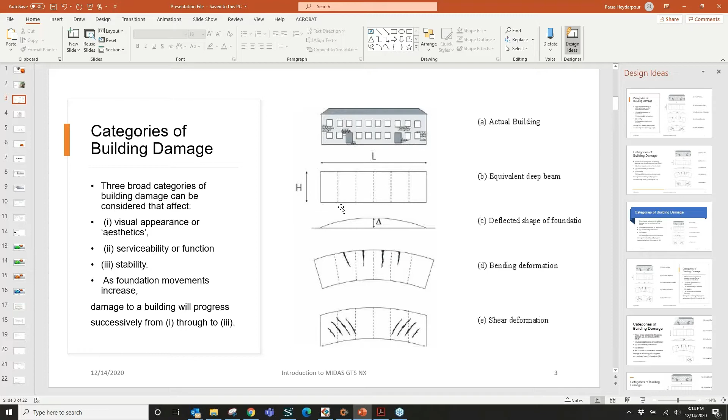And obviously, as you have more displacements, the cracks will open and you will have more challenges facing you. Here in this slide, I'm trying to give a presentation of different levels of damage that we can face.

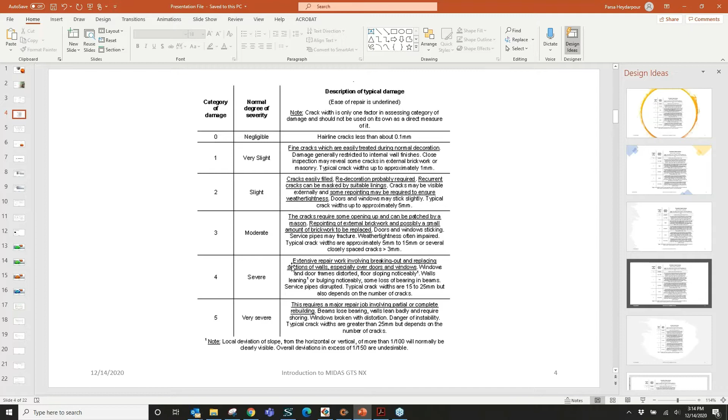It goes all the way from negligible, which is pretty much hairline cracks at 0.1 millimeter, all the way to cracks that are almost an inch in width, which can jeopardize the stability of a structure, and all other cracks anywhere in between.

So as I told you, there are many different researches out there to try to quantify these damages. One of them is proposed by Mr. Burland and Wroth, which we incorporated here at STE quite a lot to evaluate, especially for the Northeast Boundary Tunnel project located here in Washington, D.C.

Using a software, you come up with the settlements that you have, then you turn those settlements into displacements, and displacements into tensile strains, and then you have a measuring tool that you can use to evaluate what level of damage you should be expecting.

So having this in mind, this is going to be the goal of this project—to have a structure. For example, you can see the footprint of this structure adjacent to the excavation. So basically, we can define investigation points, and these investigation points are going to be used to determine what settlements we are expecting.

And based on those settlements, we can evaluate the building, see what type of sagging or hogging or compression or tension that's going to be exposed to the facade of the structure.

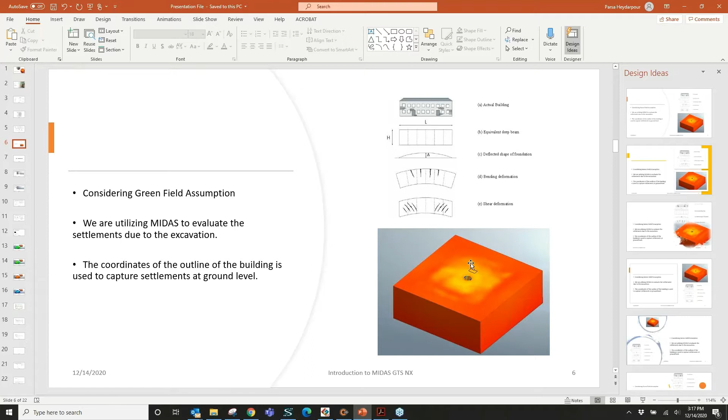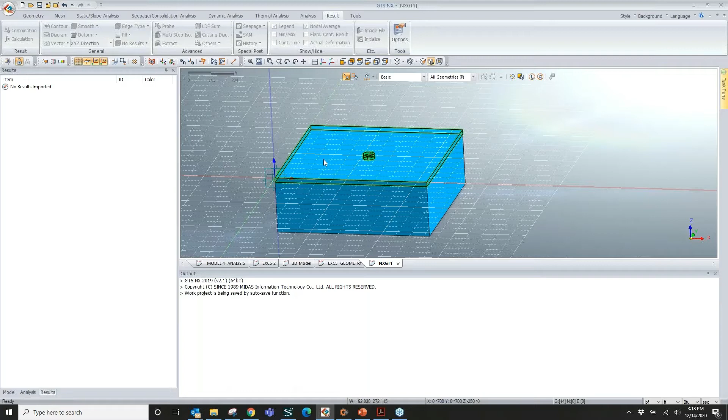So having this in mind, today I want to go over a few MIDAS tricks in order to model a shaft, and let's see how far we can get. If we have enough time, I would definitely like to go toward showing how to do dewatering, which is extremely important in order to get realistic settlements. So I have a few sample models here.

Again, the mentality is the same, whether you have a rectangular excavation with a different pile, with multiple piles and different levels of strutting, or a simple shaft. The mindset is the same, only the application is a little bit different.

Let's start. So I'm going to create a new model. And as you probably know way better than I do, in this page you just go and set up what system you want to work with, and then hit OK to create a new model. And then I would like to go a little bit over how to define a geometry of the model.

So I'm going to define a rectangle to work as the boundaries of my soil box. So I do 700, 700, and I will call this layer soil. This is going to work as the boundaries of my soil box.

And then I would also like to have a shaft, which is going to be a circle, and I do a radius of 15, and I like to call it excavation. So it's created here, and I need to move it.

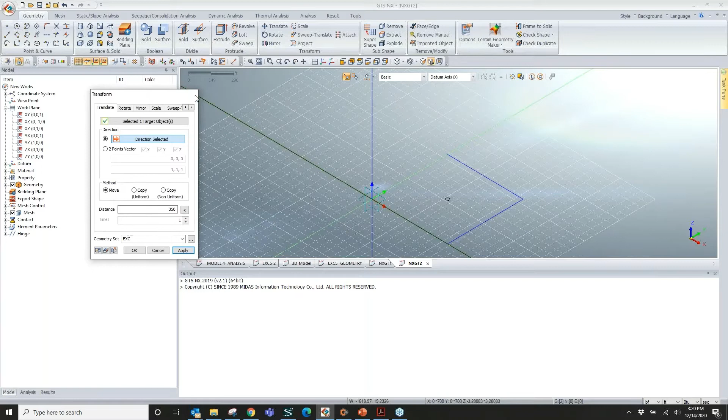Okay, so now I have my excavation. I have my soil box here. I have my circle that's going to act as my shaft. And now I also like to have a few cutting planes that I'm going to use to cut my soil planes and everything. So 0, 0, 1000, 1000.

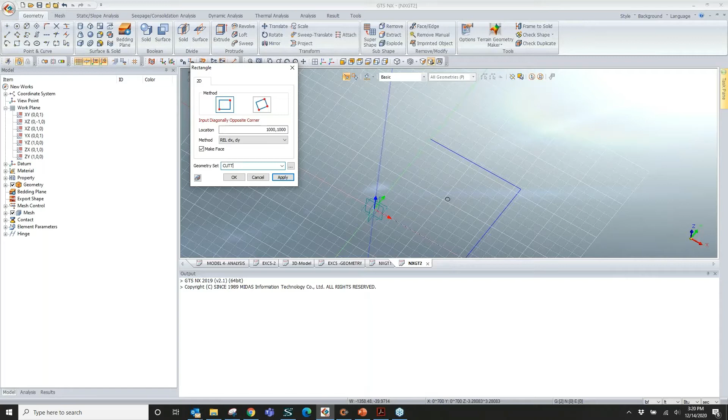I would like to make a face, and I would like to call it cutting face. Apply. Now I have this.

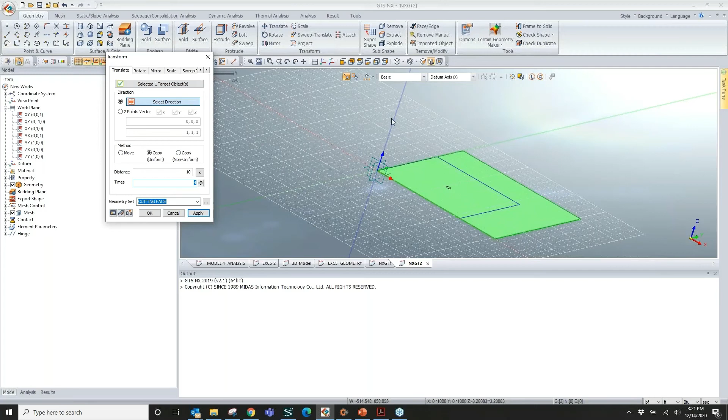Now again, I'm going to use one of the very useful features that MIDAS has implemented inside: the copy feature. I want to copy this every 10 foot for 4 times. This is a very useful thing to preview. Oh, okay, it just tells me I need to select the direction. Forgot that, I do preview. It's wrong direction, I know. That's the beauty of preview, so you can see before applying.

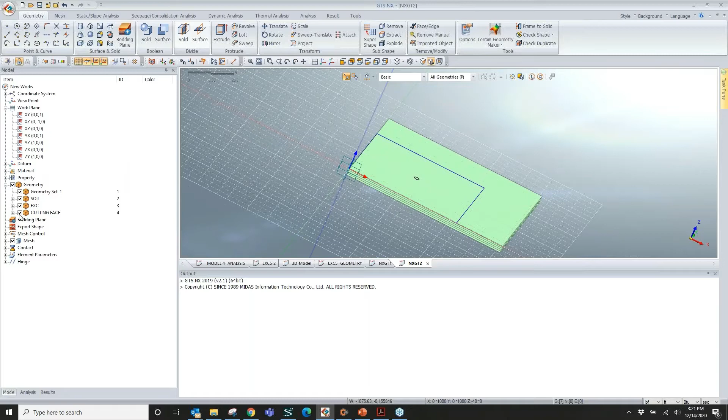Cutting faces, apply. So now I have created all my cutting faces that I'm going to use later on. And I always like to put them under different names. Later on, you'll realize how valuable this trick is to have them in different names.

And now I'd like to extrude in order to get to my geometry. So select objects, I would like to do select edges. And then I would like to do a -250, definitely under soil. Apply. Then direction, we forgot to select direction. Apply. That is good, that's what I wanted.

And then I'd like to do my geometry, similar. Select object, edge. I would like to do a 50 foot, a -50 foot. And then again, definitely under excavation, preview, apply. And now I have this.

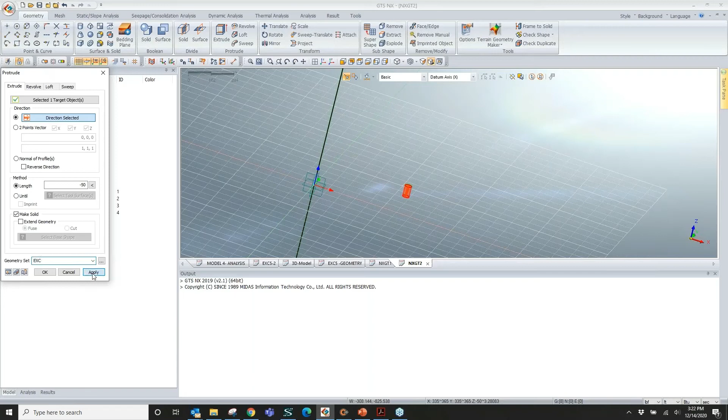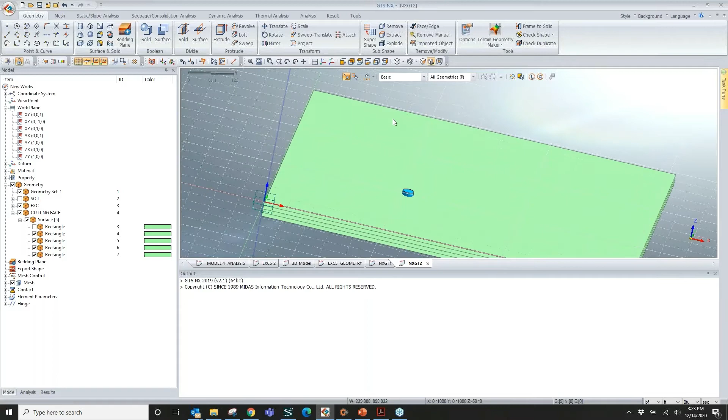And as you know, when you have an excavation of 50 feet, you are not going to do it in one step. So you most probably need to divide it into multiple stages of excavation. That is why we generated these cutting planes. So what I'm trying to do now is divide that one-stage excavation into multiple, using these faces. We are going to tell the program that we want to apply this into multiple stages.

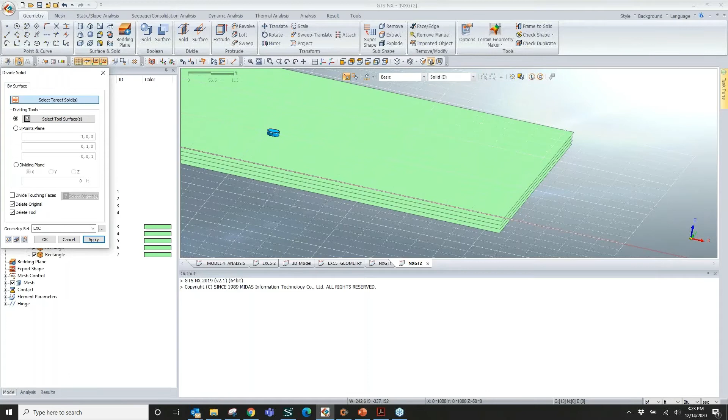So now if I turn my cutting planes off, now we can see that we have each layer, and later on when we define the different stages of excavation, each of these is going to be excavated at a different stage.

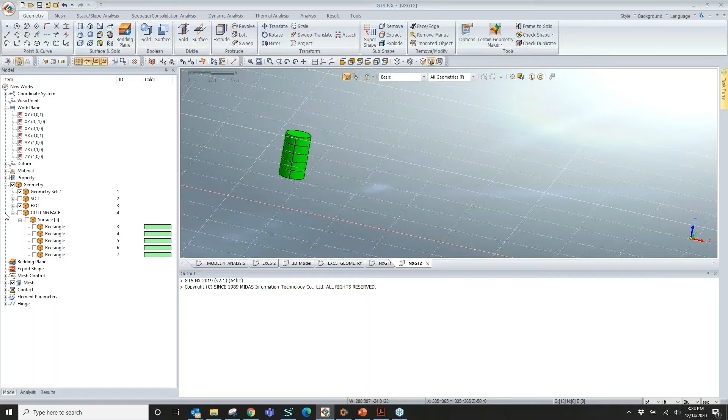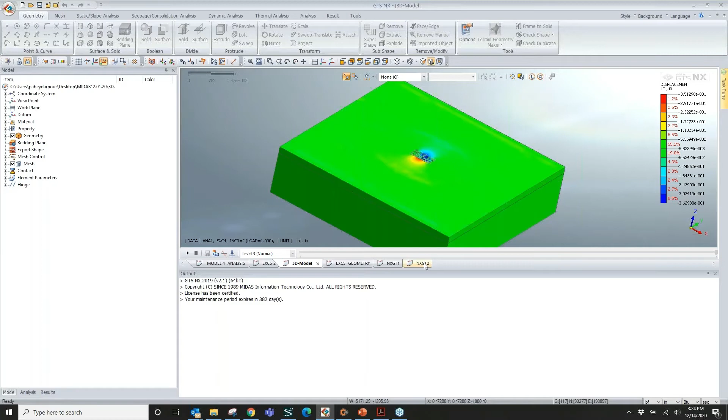So the same thing can happen to your soil. So for example, you can have one layer of soil similar to what I have here, or you can have multiple layers of soil similar to what I have in this model. Generally speaking, the modeling is not really different, but if you have multiple layers of soil, MIDAS has the capability of applying that as well.

So for this example, I would like to divide this into 2 segments. So later on we should be able to assign 2 different soils, 2 different soil types here.

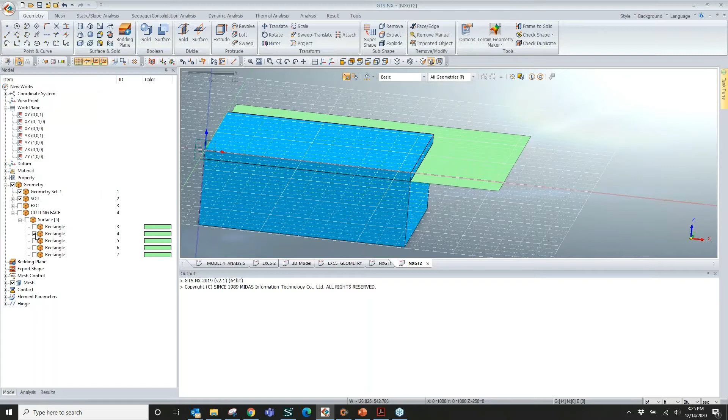Apply. Now, target object. One second, because I need to hit escape. Okay, solid, select target, there you go. Surface this one and this one. Fine, okay, now I can turn this off. Now I have 2 different layers of soil.

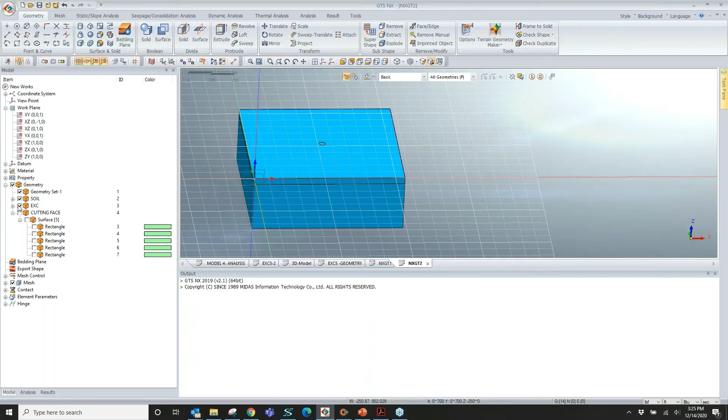One other thing we need to do is make sure our geometries are recognizing each other. When we want to excavate, we need to make sure that at each stage the connections are properly done. MIDAS has an auto-connect feature, so I can do this, and now we can see the geometries are recognizing each other. This is a very basic overview of things we need to do in the geometry portion in order to model a shaft excavation.

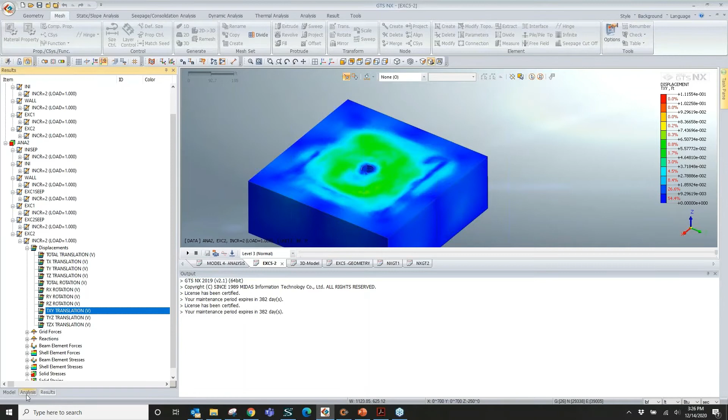The most important thing in my mind is properly defining materials and properties. MIDAS has quite a variety of different constitutive models you can work with. In one of the files I prepared for this session, I have defined all of these, so let me pull up the file I wanted to present. Let's unlock this so I can go over the differences.

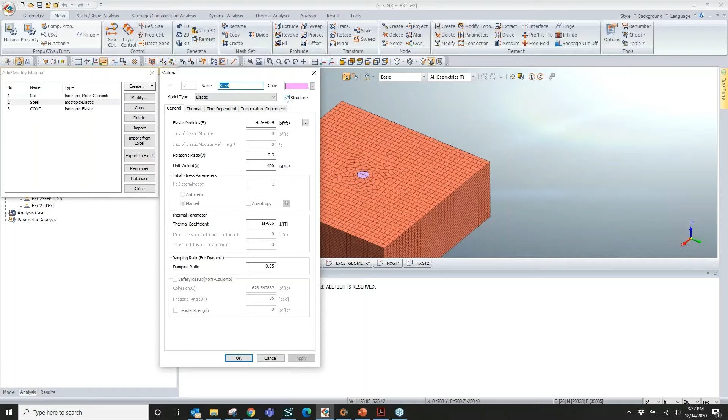For example, for the soil I have used Mohr-Coulomb, and you define all the properties you need. Make sure that if you want to dewater, you need to define the unit weight of saturated soil - that's very important. If you have a structural member like a steel rib, you need to click on structure, so the porosity parameters can no longer be defined for a structure. If you have a shell element, that could be your steel corrugated beam, steel corrugated sheets, or a concrete diaphragm. You need to define them here, and later you can define their properties.

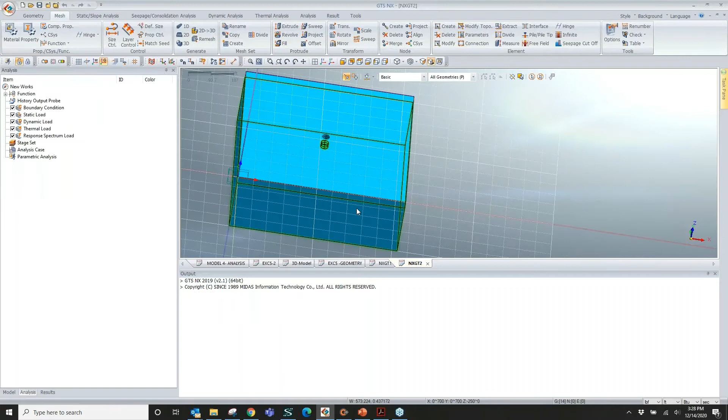Actually, I'd like to go over this, because in this model I also had steel ribs, and that's something I'd like to show you how we typically do it.

If you have this curve on - let's say you have 5 stages of every 10 feet and you want your steel ribs spaced every 10 feet - you have this capability embedded in MIDAS where we can draw these circular sections, and later assign them whatever geometry we want. Then we mesh them and they work as our steel ribs. In order to do that, I need to use the translate option here.

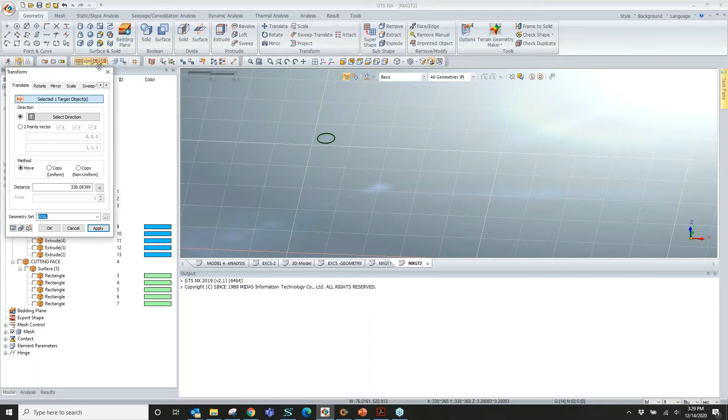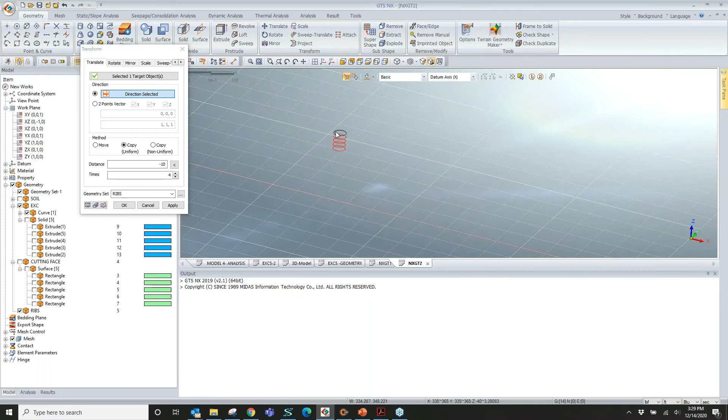I have selected my geometry. I do every -10 feet for 4 times, and I need to do copy uniform 4 times. I want to create a new group and call it steel ribs, or just ribs. I add that here, then I'll be able to select ribs. I do a preview - looks right to me. Later, we will select a proper W section, assign this geometry that specific W section, and that should be good enough for us. Then we mesh that, and that will act as our steel ribs. I hit OK, and now I have my ribs as well.

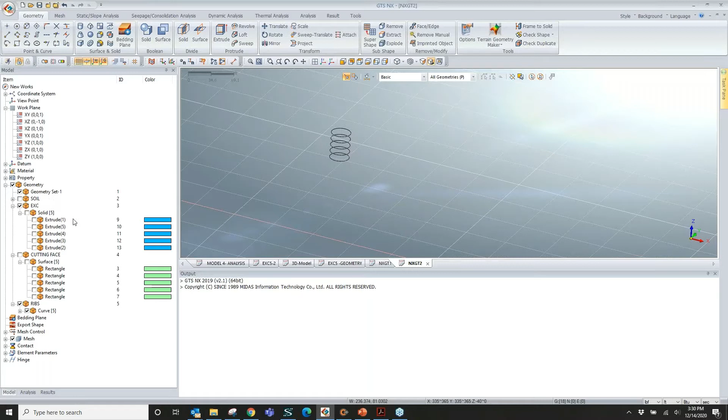If I turn this off - one good feature MIDAS has is you can easily move things around. So if I want all 5 of them together, I can just drag and drop things. This is a very handy feature MIDAS has. I appreciate every engineer working hard to make this program user-friendly. I'm someone coming from the background of FLAC, so I know what not being user-friendly means.

So let's go to - now I guess we have properly covered the geometry.

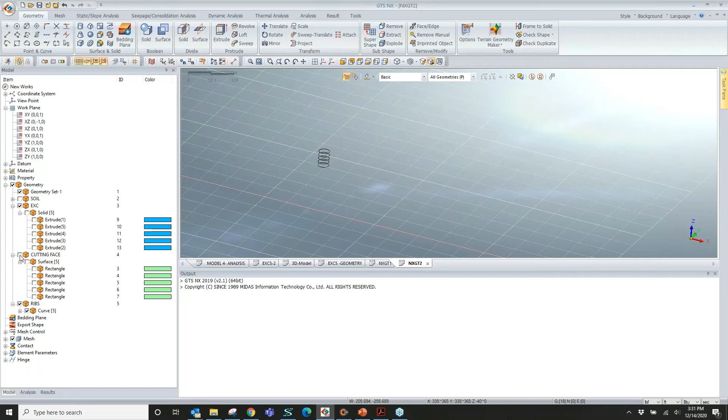After this, the next stage would be meshing, which I have a model here. I'll give you a few pointers on how to do the meshing. I'm sure you know better than I do, but I always recommend a 3D mesh.

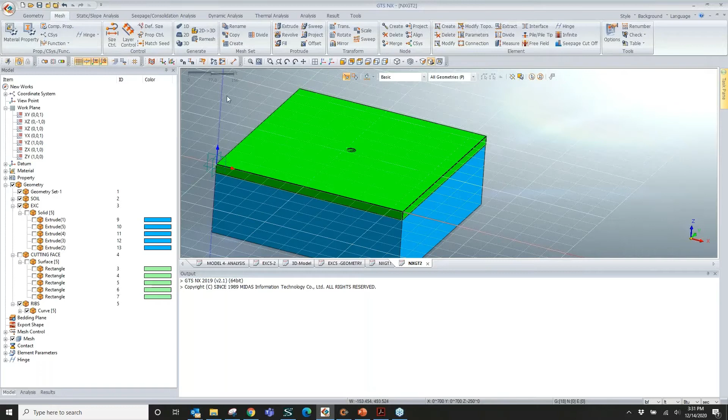One good feature MIDAS has is if you want to give the program a hint on how you would like to mesh it, you can define nodes here. For example, on each edge I can define that I want 20 points, and later the program will use these points to create the mesh set you have. So if I select these corner points and tell MIDAS I want, for example, 5 nodes on each one, I can later use these nodes to guide the program on how to mesh the geometry.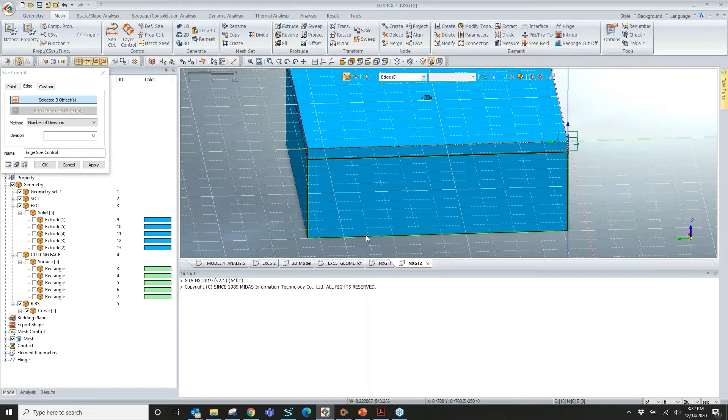These few things, these small tricks, really become handy to have a model that isn't too big and keeps the running time from becoming crazy long.

Are you with me, guys? Okay.

Are you okay? Perfect. Sorry, my internet just... sorry. Go ahead. Oh okay, sure.

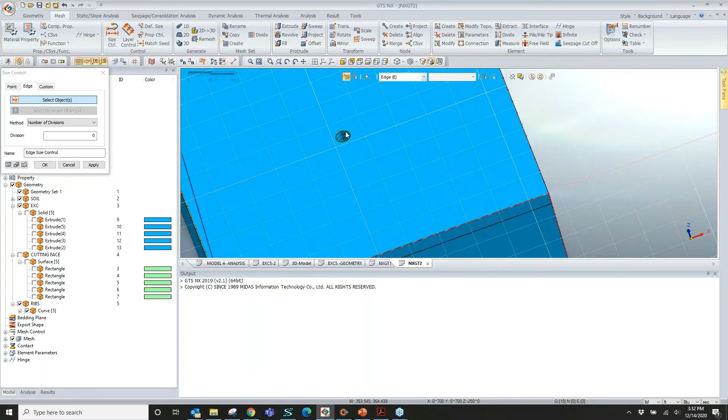Similarly, we can select edges for the circle and give divisions to this as well. This will help guide the program to give us proper meshing, and later on you can easily use the auto meshing capability of MIDAS. I'm not going to mesh it right now because it will take an extremely long time, I'll just show you what needs to be done.

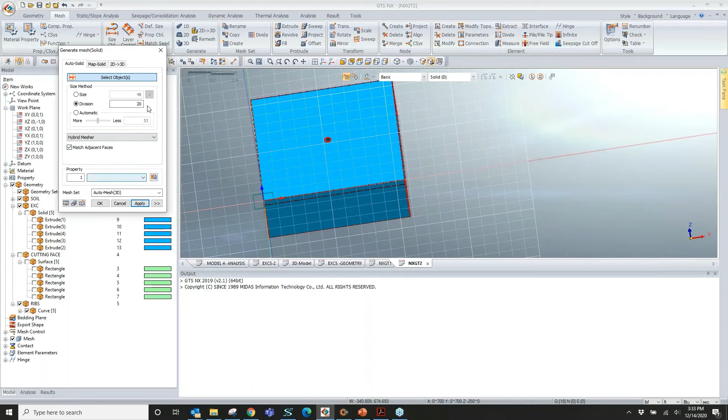Properties, as I showed you before, is probably the most important thing. It needs to be done first. Properties need to be defined. We have them here - we define our soil layers, the wall, the ribs, everything. So that should be it.

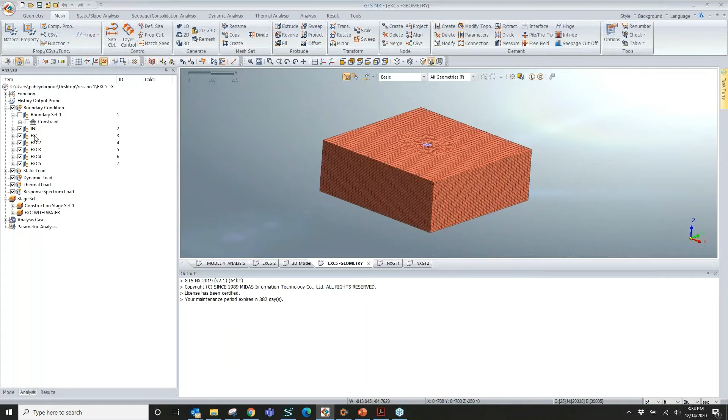After meshing, the next stage would be defining the boundary conditions. Boundary conditions is where it actually becomes important for the dewatering phase. So the first boundary condition that we definitely need is the constraints that give us the exterior of the structure. We use the auto boundary feature of MIDAS, which automatically goes and fixes the degrees of freedom that need to be fixed.

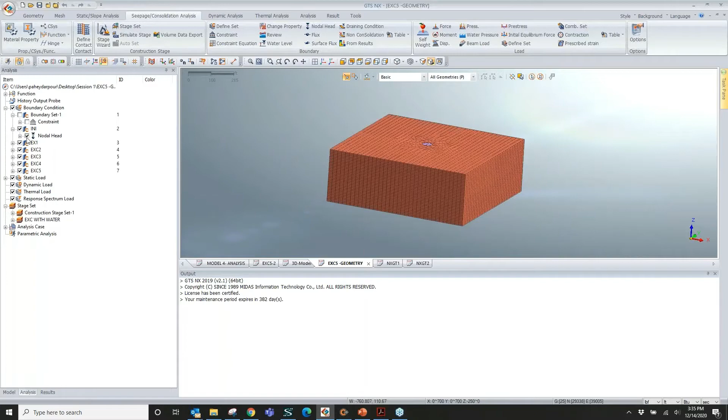After that, all these other boundary conditions I have are correlated to the dewatering feature in MIDAS. In order to do that, we need to use the nodal head feature incorporated in MIDAS. For this specific case, my assumption was that the initial water is at ground level. With the nodal head function, if I come and edit it, I can show you what we have defined - we've given a 0 feet total head for all these nodes. Basically, we have defined the water head to be the same as z equal to 0.

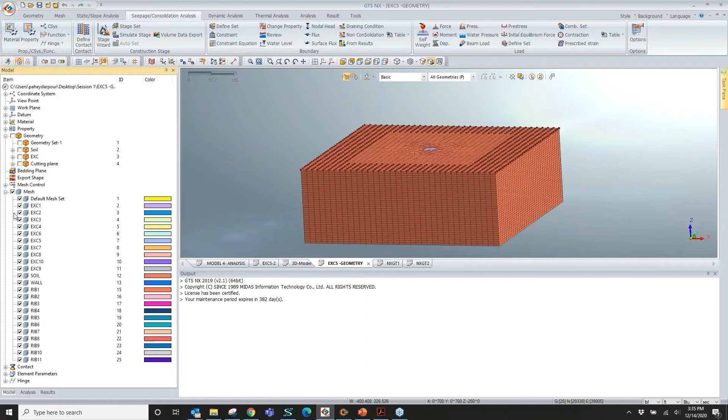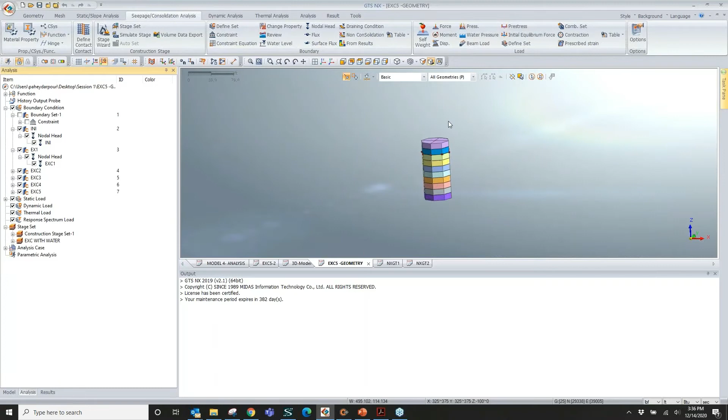Later on, if I go and turn off the mesh and just keep the excavations on, I'm going to show you the dewatering stage now. If I go to boundary conditions, under analysis, under boundary conditions, we have defined - each of these stages is 10 foot - so we tell the program that we'd like to reduce the water head for these nodes up to -20 feet. Then there are different stages, for example in excavation 2, the same thing happens. So at each stage, we tell the program that you need to dewater further and further. In one of the examples, I'll show you how the program implements that and how the results show.

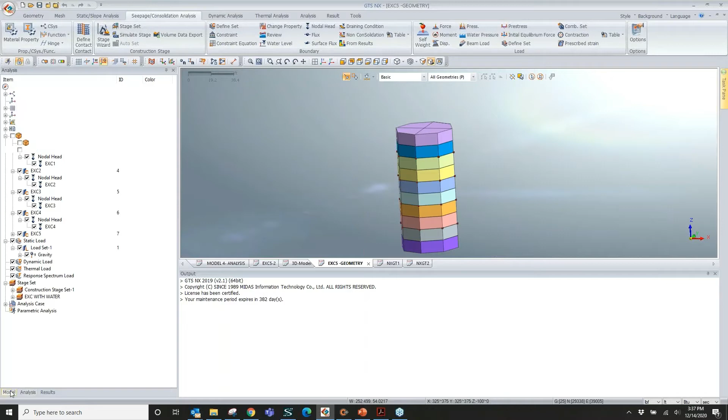What else? Obviously we will have our gravity, which is basically the dead weight of every element - we need to apply that, that's a must-have, I know everybody knows that. So we apply the self-weight of the system. In this particular case, we don't use any other material change or dynamic load applied to the system.

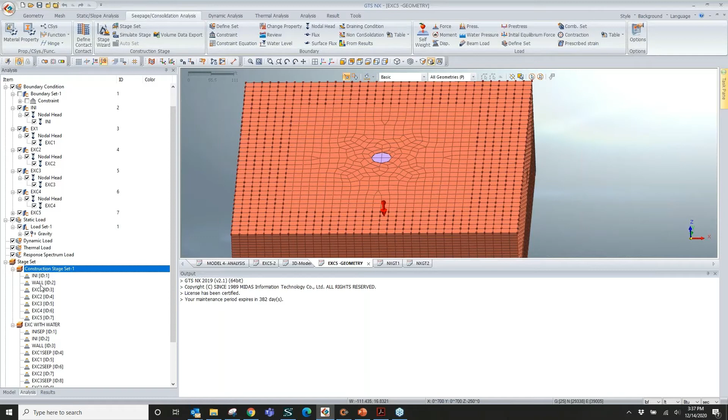So I'll quickly go over the different stages I have defined for this specific analysis. As you can see, I have two different models here - one is with dewatering, which has dewatering stages defined, and one just with dry material properties. I'll first go over this one, and later we'll cover the one with dewatering incorporated. Here I want the program to show me the active stages. So what I do is put all the soil layers, all the different excavation layers, and then I also apply the boundary conditions to the system as well as the self-weight.

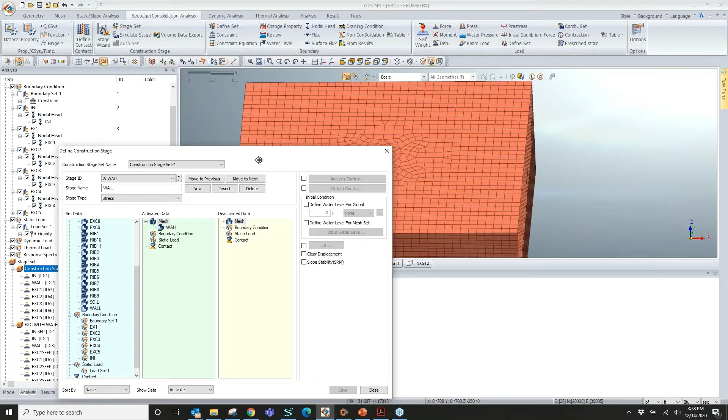In the next stage, I go and define the wall to the program. This wall is the exterior shell element that we use. For example, in this specific case, we have a diaphragm wall that is a shell element, and we go and define it here.

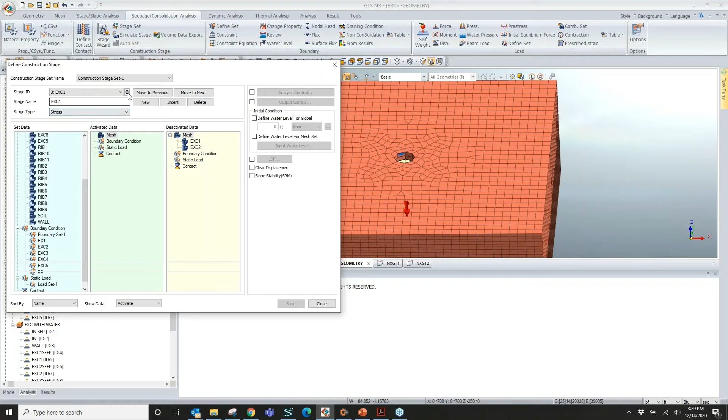Later on in the next stages, we start excavating all the way to the bottom of excavation 1. Again, in this specific model, we really don't have any dewatering modeled into the system. Similarly, we just keep excavating all the way to the BOE, and obviously if you have ribs or anything like that, you also apply that as you excavate.

Now I'd like to go over the dewatering, because that is the one that has a little bit more challenges. So you need to make sure that when you define your analysis, if I want to define a stage analysis, you need to go and select the proper analysis case, which is a stress, seepage, slope option, which is the third one.

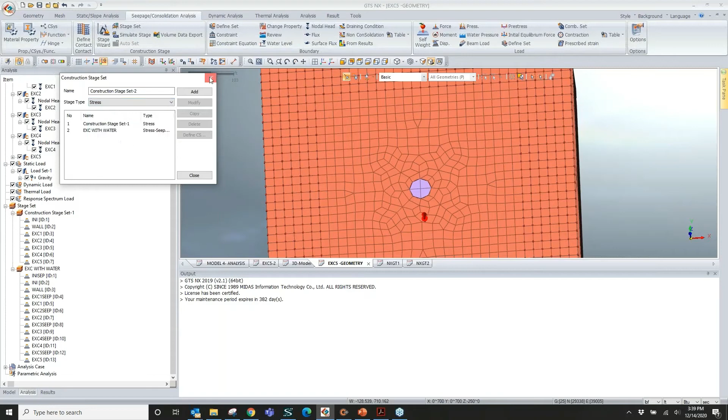And the seepage analysis case is a steady state case, so you need to make sure you select the right stage. The boundary set you apply for this stage is basically that the water level is going to be at the initial level, and then every stage you need to have one stress analysis and one steady state analysis. So they go hand in hand to give you a coupled type of analysis that considers both water and stresses.

So, for example, now I apply my boundary set, my boundary conditions, and I also apply my gravity. And as you know, this is going to act as my initial stage. So typically, I would just tell the program if I want to clear out the results, so whatever happens afterwards will be the results of my excavation.

Again, the wall excavation, the wall installation, which is just a stress analysis. You know that the wall installation is its own process and procedure. If you want to consider the wall excavation on its own, you can have a separate model developed for wall excavation to analyze all the ground displacements that occur during it.

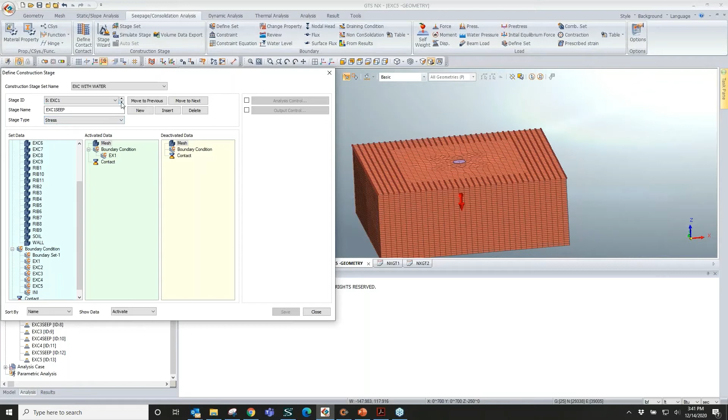In the first stage, as you can see, I have activated the boundary set excavation 1, which, if you remember, we dewatered all the way to 20 feet. And this is a steady state analysis. Later on, we do a similar thing: we do the excavation and we apply the steel ribs. This will be repeated all the way down.

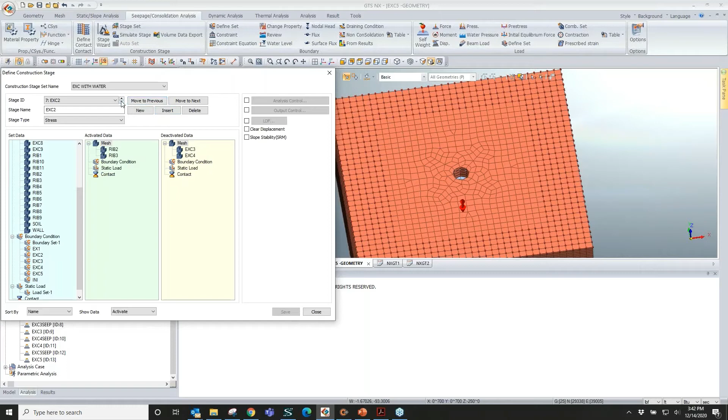So for one steady state analysis that you change, you also need to deactivate the old boundary set and activate the new one. Again, one steady state analysis, one stress analysis. This is done all the way to the bottom, and then later on you need to define your analysis cases, which I'll just give you a hint about.

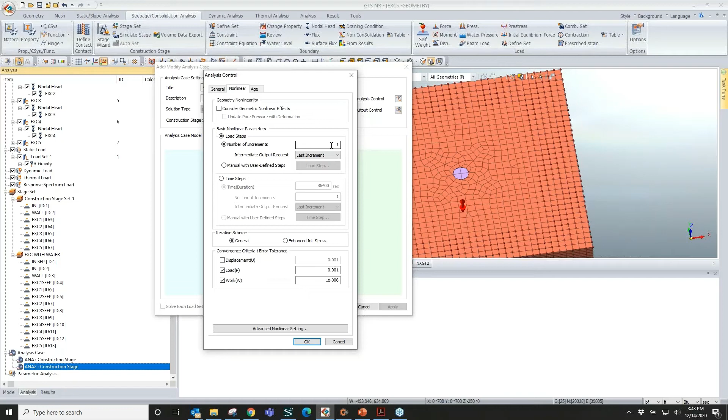For example, here we have two options: the analysis without dewatering and the analysis with dewatering. Always make sure you check the proper settings. For example, if you want the load applied in multiple stages, make sure you have that applied - that could save quite a bit of time. And all the other nonlinear analysis details that you want to incorporate.

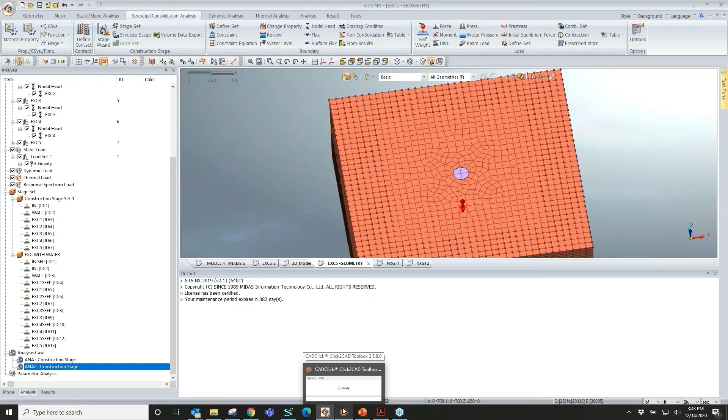Without further ado, I would like to go back to my slides after giving you a brief description of how the modeling works. I have already covered this one, and covered that one.

Okay, so after you do the modeling and let it run for a significant amount of time, let's not forget what we intended to do - we wanted to analyze an existing structure, a facade of an existing structure, due to excavation. So I want to know what settlements and what plane displacements I get out of my analysis. Let's say point A, point B, point C are the exterior facade of this specific building, and I go and get the outputs out of the program.

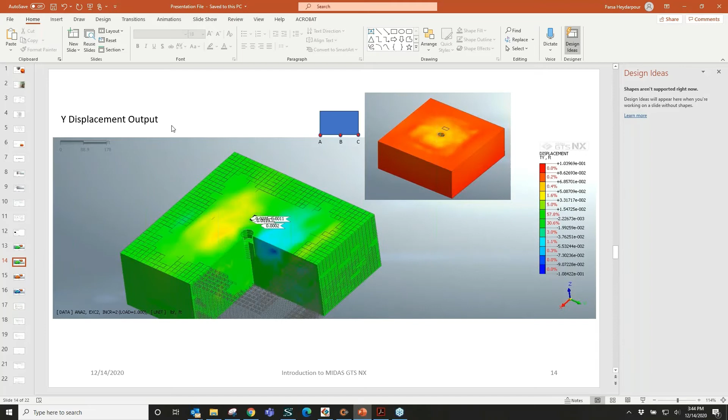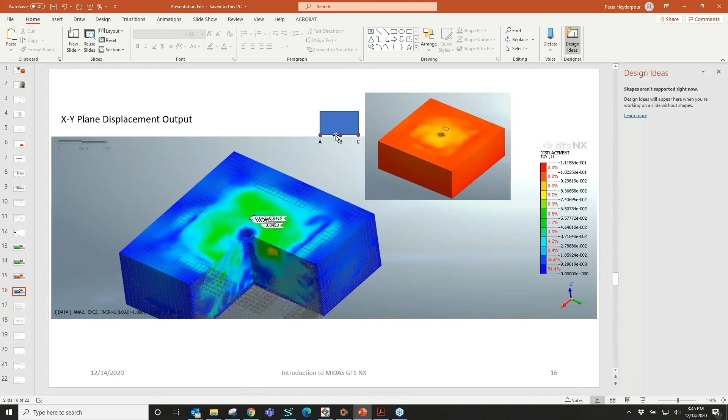Let's go back to the Burland and Wroth method, which uses - so basically I had point A, point B, and point C, and I wanted to see how the facade of this particular structure is going to act. So I go and, using the magic of MIDAS, see what settlements I get at these points.

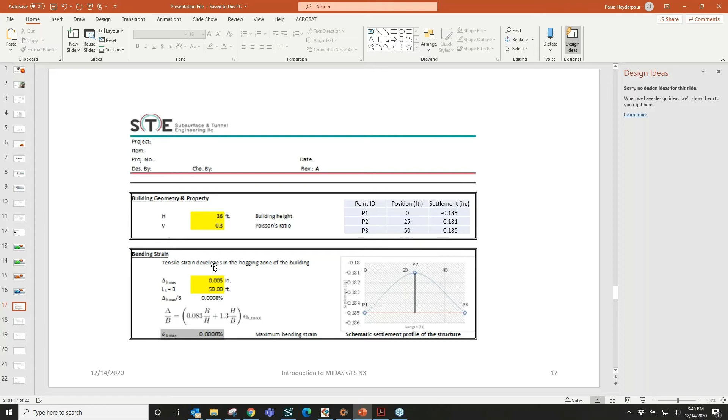Incorporating that into the Burland method, I will be able to know what strains I get. What I'm interested in, obviously, is the two components: one would be the bending component, and the other one was the shear component. Applying the equations coming from the research of Mr. Burland, we get the strains - the horizontal strains, the diagonal strains, and the total strain.

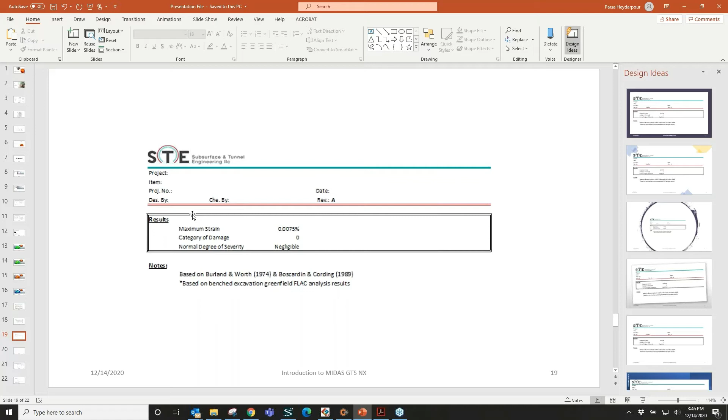And the total strain for this specific case, under this specific soil conditions and everything, the maximum strain I was getting was 0.0075%, which would fall within the negligible zone as we defined all the way back in the purpose of our analysis. No, I guess we are early.

So here, yes, here we defined the critical numbers, the limiting tensile strains to where the negligible zone is, where slight is, and this is what we did for quite some time, close to 2 years, for the northeast boundary tunnel.

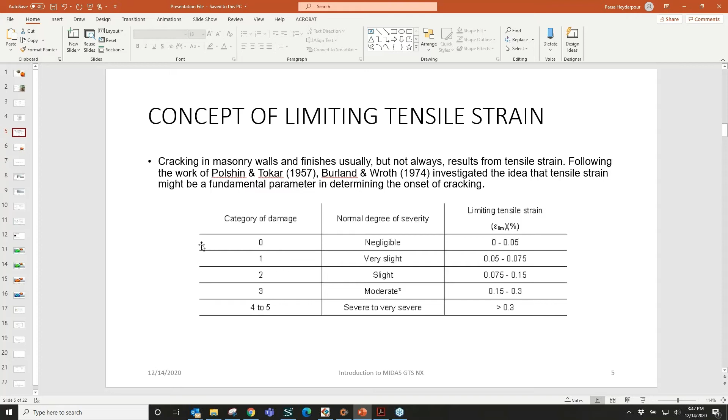And all the structures and bridges that were impacted by different excavation activities and different underground activities we had, we analyzed them, whether they were buildings, utility lines, or bridges, depending on how significant the displacements are. You approach each problem individually, and that's one of the things we at STE have quite a bit of experience doing.

I guess for now, let's go and see if there are any questions. JC, are you with me?

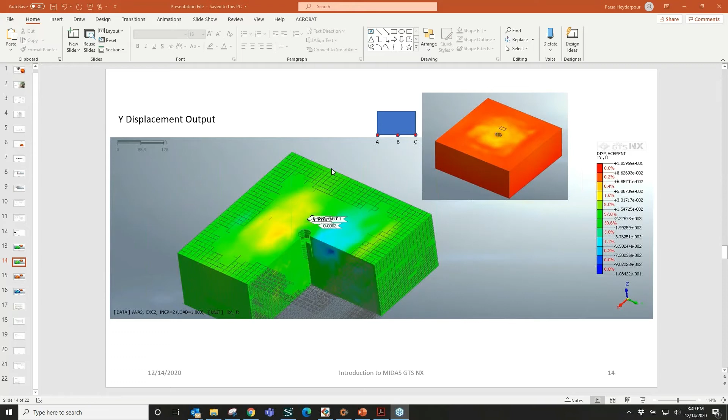I actually have one question myself. So the structure you're analyzing, with the A point, B point, and C point, how far is that structure actually from the shaft, from the excavation, in reality? In reality, first of all, I think it's about less than 50 feet.

I can double check in the model and get back to you, but it's I guess less than 50 feet, the closest point to the extent. Right, so that's the same distance from the settlement ABC point to the shaft in the model, right? Yes, so basically the closest point on the structure to the shaft has less than 50-foot distance.

But as you know, these settlements are very dependent on what type of soil you have. That's extremely important, and that's the most major thing you need to look for, what soil you have. So I really believe every single case is an individual case that requires individual investigation. These are highly dependent on the geology, the soil types, and soil layers you have, and one analysis to the other can vary quite significantly.

Right, so I saw that you modeled the soil using a Mohr-Coulomb model. Yes. I know that shear plays a really important factor when it comes to Mohr-Coulomb material failure, so since it's such a sensitive material model, how did you determine the right material properties, like the different coefficients used for this model?

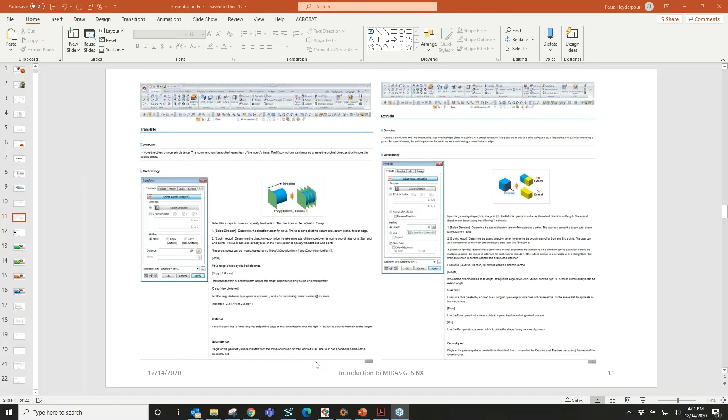So, personal note question from me: what's the difference between doing this excavation example with a 2D model versus a 3D model? I was imagining cutting the section in half and doing a 2D model of the cross section. Have you done that kind of analysis? That's a very good question to ask, actually.

So for example, 2D versus 3D becomes problematic, especially when you have geometries like this one. For a circular section, if you do an axisymmetric analysis, 2D versus 3D will be quite comparable. But let's say you want to do a 2D analysis for...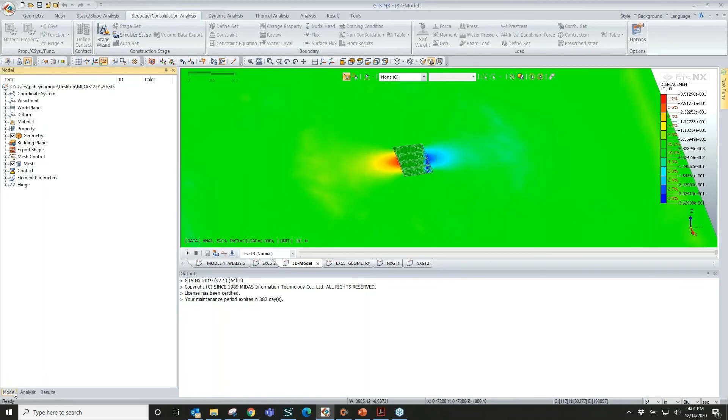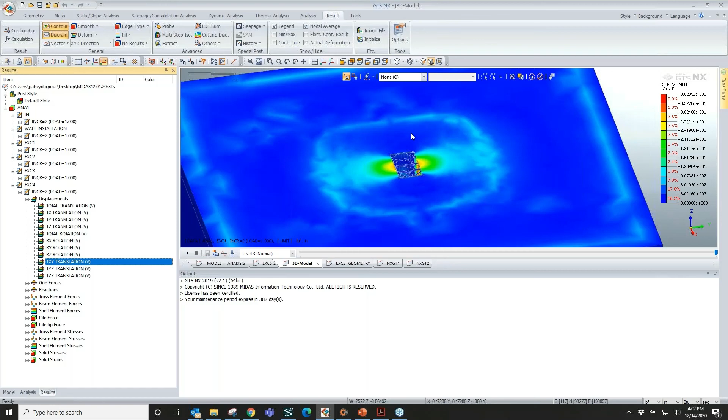Let me show a result, XY displacements for this specific excavation, both X and Y direction. Let's call this direction X, and this Y. The 2D analysis for these two directions isn't interchangeable - you can't use one instead of the other. You need a 3D analysis to see that we have quite a bit of displacement on one side of the excavation, but on the short side we really don't see much. If you want to do 2D, you need a conservative assumption, and you'd assume all points behave similar to the long direction.

That is actually something we typically did for the Northeast Boundary Tunnel - you always need to go with a conservative assumption. So even if you are located here, you'd assume this type of displacement will occur, which isn't right. Did I answer your question?

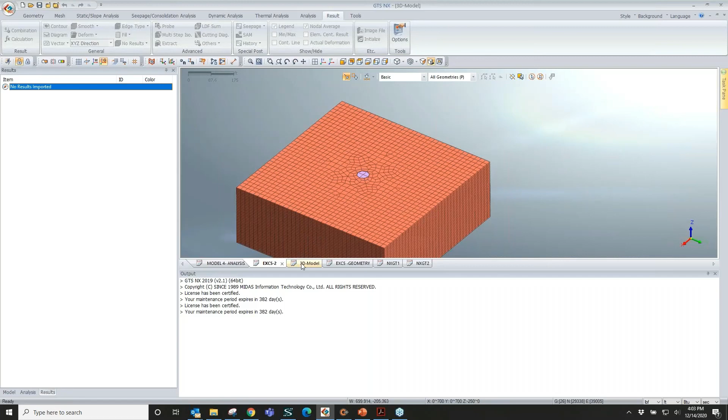Yes. Okay, but for a circular cross section, because of the symmetry, you will have way more comparable results than a rectangular excavation, if that answer suffices.

Right, I was just curious because it's a circular excavation, and you mentioned symmetry, so why didn't you just use a 2D analysis instead of a 3D one? The purpose of this session was to go through a 3D analysis, but we definitely can do a 2D one and compare. That's doable - you do an axisymmetric analysis, and that should also work quite well.

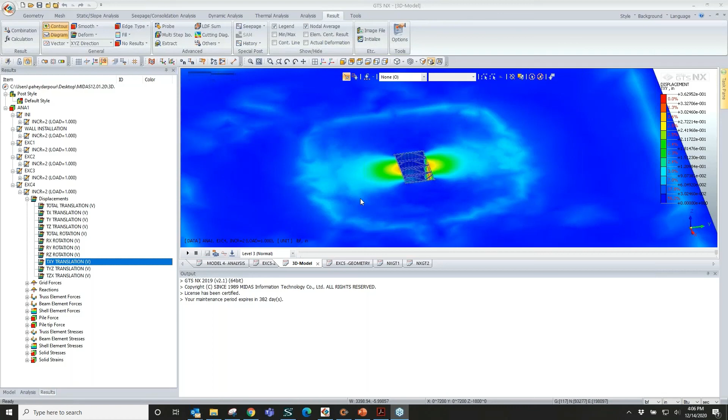No, not really. I wish everybody a Happy New Year and Merry Christmas. I guess that's it. All right, thank you so much. Have a great day and bye. Yeah, you too, bye-bye.